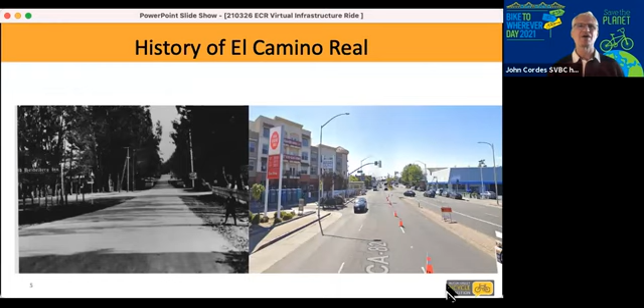All right, Gwen, take it away. Yep, so I just wanted to give a very brief history of El Camino Real.

As many of you know, originally the purpose of El Camino was to connect 21 different missions throughout the state of California, all the way from San Diego up to Sonoma. Then in the early 20th century, the section of El Camino Real from San Jose to the San Francisco county line was one of the first paved streets in California. This created a boom of building along El Camino Real, and you'll see a lot of auto-oriented motels and large parking lots, and also a lot of the major downtowns for cities along El Camino are just right off of El Camino.

These photos, I tried to line up exactly at the same spot, but the first one is from 1914 in San Bruno on El Camino Real, I think right at the San Mateo Avenue intersection, and the one on the right is today. You can see there is new development along El Camino, but you still have a lot of that historic auto-oriented land use and also streetscape. Next slide.

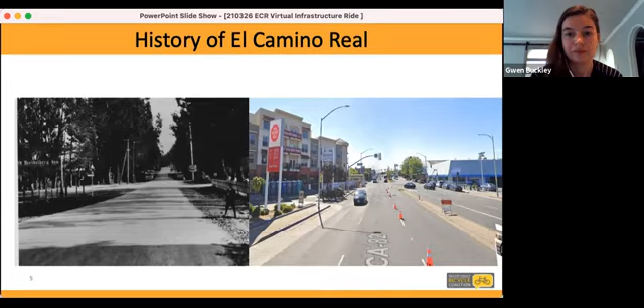As cities were looking at El Camino and how to improve it and make it more people-oriented, they decided to get together and form the Grand Boulevard Initiative in 2006. GBI is a combination of 19 cities along El Camino Real, both counties, Samtrans, VTA, and regional agencies, including Caltrans, which owns El Camino Real because it's technically a state highway. The primary vision of GBI is to work together to create these connections across the different communities and transform it into more of a people-oriented destination. Next slide.

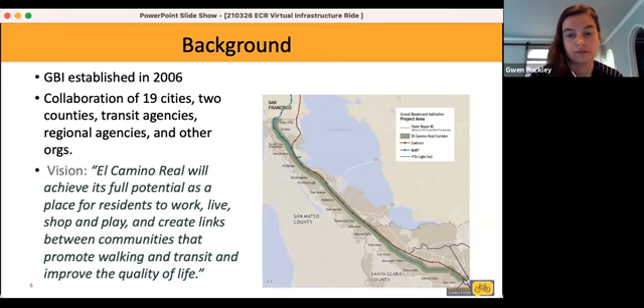Talking quickly about some opportunities for improvement from the transportation perspective: pre-COVID, traffic was getting worse and worse, and it wasn't sustainable to keep focusing on the automobile. There are lots of opportunities for alternative modes of transportation. El Camino Real is a direct north-south connection going through many downtowns and connecting many different destinations, so there's opportunity for bike facilities along El Camino. It also touches a lot of major transit stations, including 5 of the 6 BART stations in San Mateo County, within a quarter mile, as well as a quarter mile of 10 Caltrain stations, with even more Caltrain stations within a half mile. It's also a major corridor for bus transportation. Next slide.

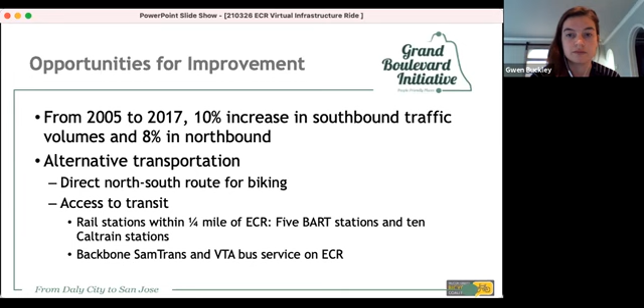GBI provides overarching coordination and shares best practices, with common goals and guiding principles, but it's up to each individual city to implement the GBI vision in ways that best serve their community. You'll see a lot of that today in these presentations, showing how there's an overarching need to improve El Camino Real, but each city approaches it in ways that best serve their community based on different unique needs. Spoiler alert: Burlingame has huge trees that other cities don't, and that's another factor they have to consider. Here's the website if you want more information about GBI.

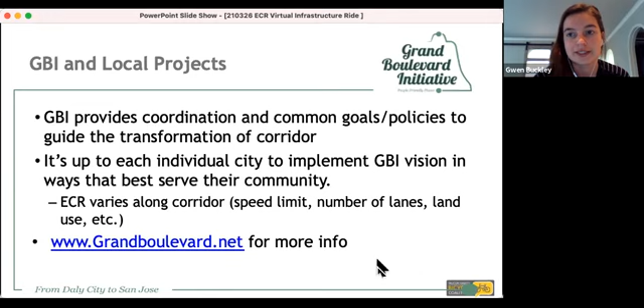Here are the segments of El Camino Real that we'll be talking about today, going south up to north on our virtual bike ride.

And with that, I will hand it over to Santa Clara to start us off.

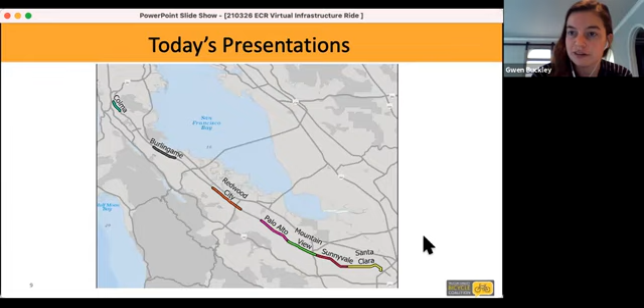Thank you, Gwen. Once again, I'm Lesley Xavier with the City of Santa Clara. I work in the planning department and am the project manager for the El Camino Real specific plan. Also with me today is Carol Shariat from our Public Works Department, and we're going to split the presentation.

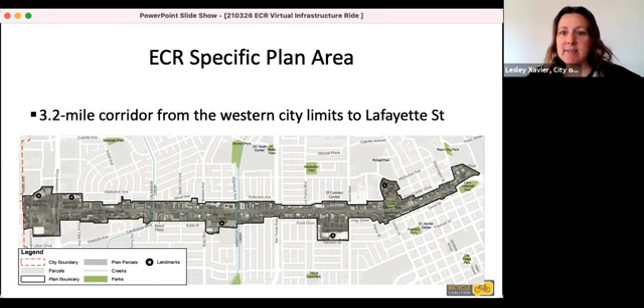A little bit about our project: El Camino Real in the City of Santa Clara is a 3.2 mile long corridor from the western city limits to Lafayette Street in the east. Our specific plan covers both sides of the corridor and actually includes our city hall as well.

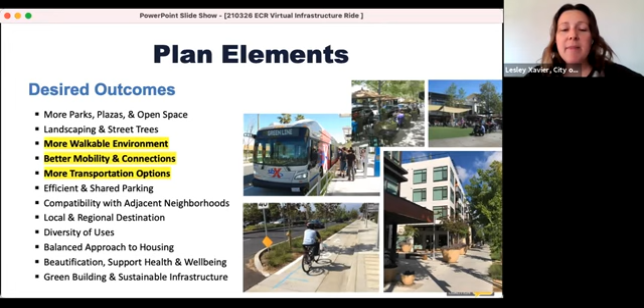Today I'm just focusing on the transportation related portions of our specific plan process. Some of the desired outcomes from our extensive community outreach process was to make the environment more walkable, with better mobility and connections. At the eastern end of our corridor is the Santa Clara Transit Station, which will have future BART and currently has Caltrain and bus service, adding more transportation options.

Here's our mobility framework for the specific plan. The goal is to make El Camino Real a multimodal corridor. It currently caters to cars, as everyone knows, with 3 lanes in each direction and parking on both sides. Buses pull in and pull out at the curb to load and unload. So the goal of the specific plan is to make that a multimodal corridor, providing connections north and south to the corridor as well.

We have north-south connections that are a transit priority access corridor, shown as the orange lines. We have a bicycle priority access corridor, shown as green lines going north to south. And vehicle priority are the blue lines north to south, along with our expressways that traverse the corridor—providing connections for all those different types of modes.

I believe Carol was going to start with these slides. Hi, once again, I'm Carol Shariat, the Principal Transportation Planner in the City of Santa Clara. Here we just want to show existing conditions, what we have today on El Camino.

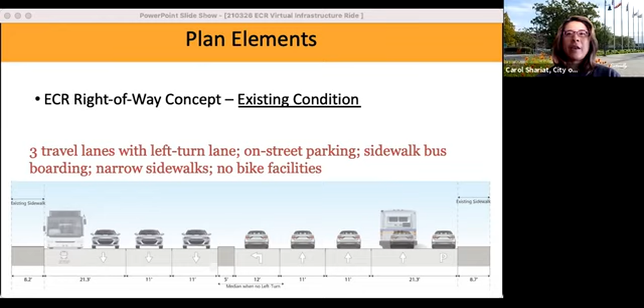We have 3 travel lanes and a very wide right turn lane due to our paving project that occurred on El Camino. We had asked Caltrans if we could widen that right turn lane in anticipation of a bike lane. You'll see that we have very narrow sidewalks and on-street parking, and no bike facilities.

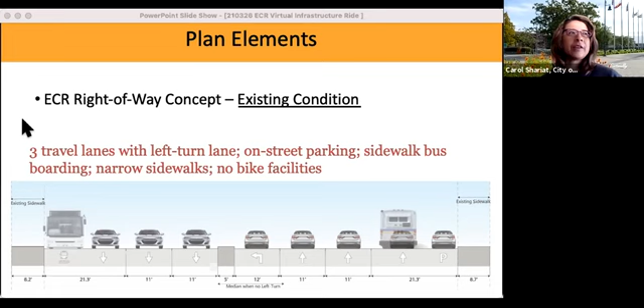We have an interim concept developed for the project. We want to put in some type of physical barrier—it could be a median or some type of bollards. We do have our bikeway planned, but we don't know yet exactly what it will be; it may be a buffered bikeway, or possibly a class 4 facility. This is just the interim until redevelopment projects come through. We don't have any funding for this yet, but this is our initial vision of what it could look like, with wider sidewalks, street trees, and removal of on-street parking.

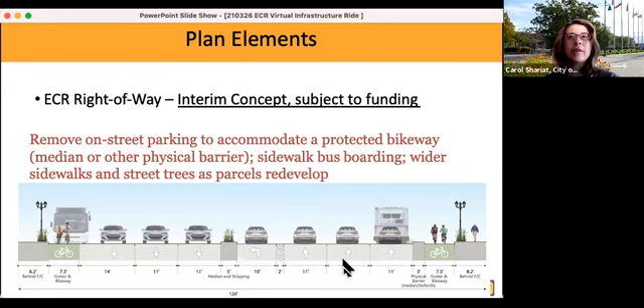Our final concepts, once everything has been redeveloped, include 20-foot sidewalks, street trees, furnishing, a cycle track, and bus boarding islands.

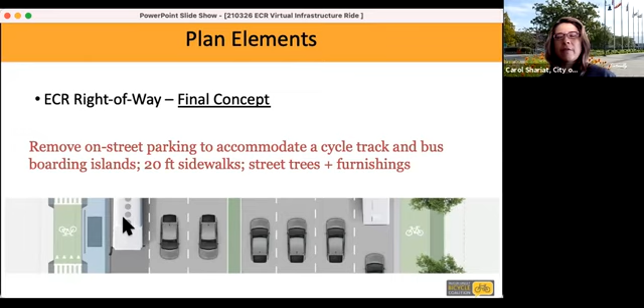This is a bird's eye view of what it would look like. On the left-hand side is where we would have our bus boarding islands, as if we had a bus stop there. On the right side is where we do not have a bus boarding island. You can also see our protected bike lanes as well.

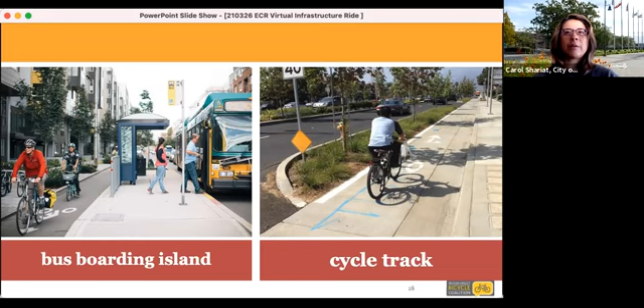These are just some examples showing what it could look like. We haven't really determined what our cycle track will look like, but at least we wanted to provide examples for everyone in the public. On that left side is an example of our bus boarding island.

I'll hand this back over to Lesley. Sure, so we're currently making some revisions to the specific plan. We should be done with that in the next few weeks for our Planning Commission hearing at the end of April, and then an adoption hearing in front of the City Council at the end of May, early June.

Our website is up there. The draft plan is posted on the website. In the next coming weeks, our final revised draft plan will be posted there as well. Thank you.

Hi, good morning, my name is Lillian. I'm going to start my presentation on the segment of El Camino Real within the city of Sunnyvale.

The portion of El Camino Real within Sunnyvale is approximately 3.7 miles long, starting at the western city limits at Bernardo Avenue and ending at the eastern city limit at Halford Avenue. It is a 6-lane arterial with 3 travel lanes on each side, with a posted speed limit of 35 miles per hour.

Along the corridor, most of the land use is retail and commercial, with some residential developments. Generally, under existing conditions, some segments have on-street parking, and some segments do not have on-street parking.

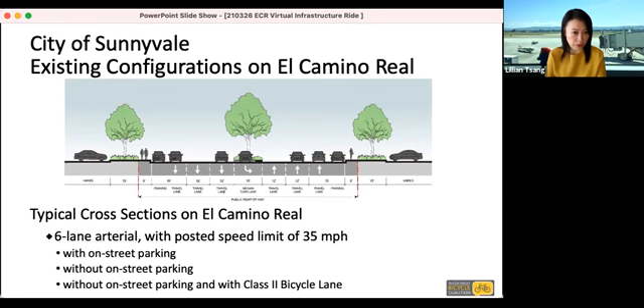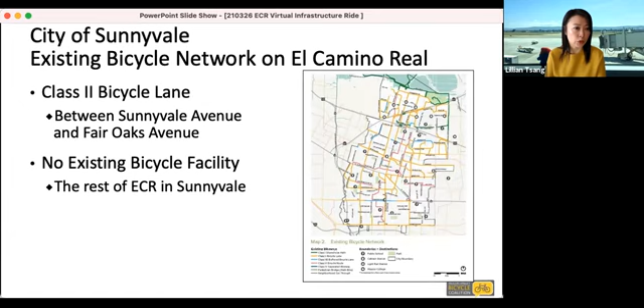On El Camino Real, under existing conditions, the only location where we have bicycle facilities is between Sunnyvale Avenue and Fair Oaks Avenue, where we have a class 2 bike lane on both sides of the street.

In August of last year, we adopted the Sunnyvale Active Transportation Plan, where we identified proposed bicycle, pedestrian, and safe route to schools improvements on Sunnyvale streets.

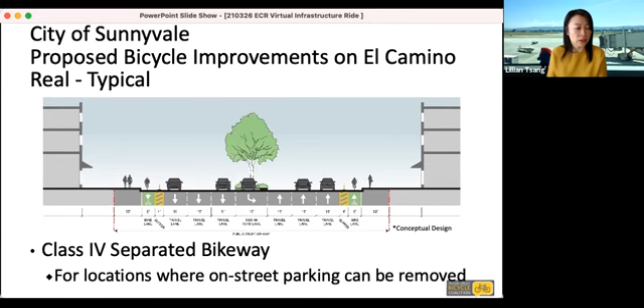The proposed bicycle improvements identified on El Camino Real include a class 4 separated bikeway, at locations where on-street parking can be removed. What we're planning on doing is putting some kind of physical barriers between the vehicular travel lane and the bicycle lane.

Along the other road sections of El Camino Real, on-street parking will remain, and what we're looking at is installing a class 1 multi-use path behind the curb.

Implementation for both the class 1 and class 4 facilities on El Camino Real are longer-term improvements which we have identified in the ATP. We envision that we would be implementing them as properties are redeveloped in the future.

The other improvements we have identified are located at the triangle bounded by El Camino Real, Wolfe Road, and Fremont Avenue. Back in 2016, we conducted a Wolfe Road corridor traffic improvement study.

In June of 2016, the City Council approved some of the safety improvements in this area. Some of the highlighted improvements we identified include installing a new signal at the intersection of Fremont Avenue and El Camino Real.

And reconfiguring the lane configuration at the intersection of Wolfe and El Camino, such that we can redirect some of the traffic away from that intersection and make the circulation for this triangle a little more smooth.

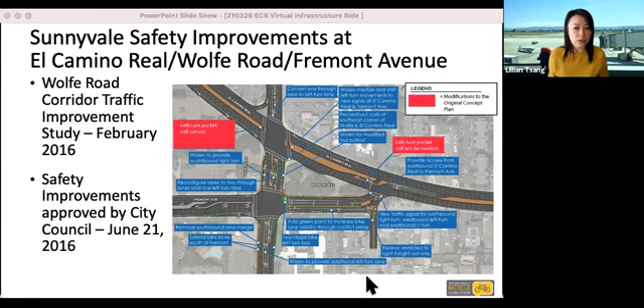We are also working on the El Camino Real corridor specific plan update. We anticipate the draft will be released for public review end of this summer, and the final plan adoption by the end of this year. If you want to find out more about the updates, you can visit the project website, or you can contact Jeffrey Cusinota, our senior planner in the community development department.

And if you want to find out more about what we have identified in the active transportation plan, you can go to our city website and search for the plan, or you can also email me for any questions you have. Thank you.

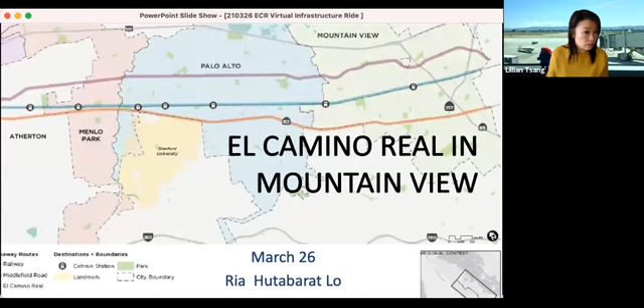Okay, so now we're moving to Mountain View. I'm Ria Hutabarat Lo, the Transportation Manager for the City of Mountain View. The Grand Boulevard Initiative envisions El Camino as a place to live, work, shop, and play through a combination of multimodal links and community-focused nodes that go all the way from Daly City to San Jose.

With that in mind, the City of Mountain View has attempted to both think and act regionally and locally as we plan for El Camino Real in our city. This planning includes the Cross-City Peninsula Bikeway Initiative, carried out via the Managers Mobility Partnership, a partnership of 4 cities: Mountain View, Palo Alto, Menlo Park, and Redwood City. The initiative has been convened by Joint Venture Silicon Valley.

Within that partnership, we're looking at 3 corridors, which you can see in this map. The first one is Middlefield Road, up at the north end of the map. The second is the kind of Caltrain right-of-way corridor, not necessarily Caltrain, could be Central Expressway, Evelyn, Alma, some combination, shown in blue in the middle. Then the orange one on this map is El Camino Real.

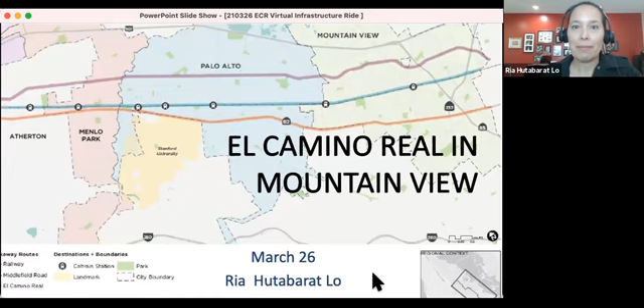At the local level, we've also been planning through a number of plans. One of them is the general plan, which identified El Camino Real as a change area within the city of Mountain View. Additionally, we have the El Camino Real Precise Plan, which called for either buffered or protected bicycle facilities along El Camino Real. And thirdly, we have the El Camino Real Streetscape Plan, which furthers the concept design for these bike facilities along the 4 miles of El Camino Real in Mountain View.

The Streetscape Plan was developed with input from the community, as well as a technical advisory committee, which included Caltrans, which owns El Camino Real the roadway, VTA, which runs its buses along El Camino, and Los Altos, Palo Alto, and Sunnyvale. The plan was approved in 2019.

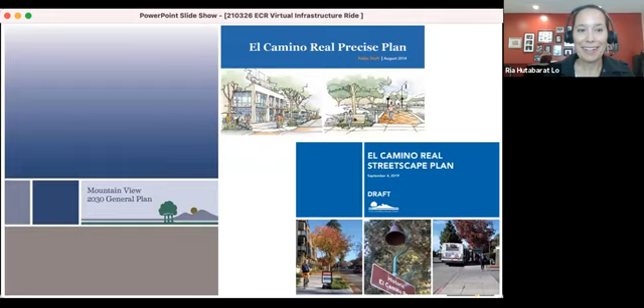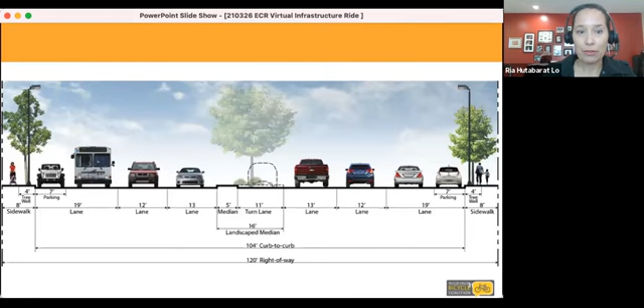Under this plan, we envision El Camino Real as shifting from its current configuration as an urban highway with wide travel lanes that allow for fast speed if there's not too much congestion. It has parking and has no bicycle facilities. It would move to a more pedestrian and bicycle friendly facility.

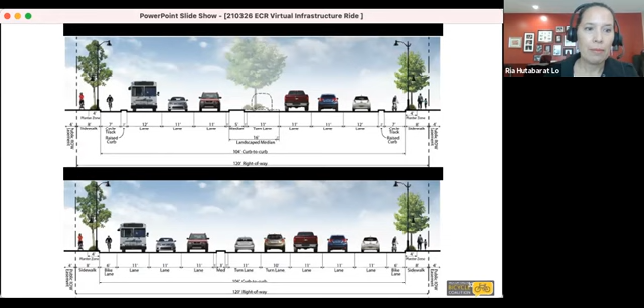Also, at intersections, we plan to have protected intersections at the cross corridor connections. So locations such as Calderon and Castro Street, those cross corridor locations would have protected intersections, and also new crosswalks at locations where there's a long distance between crossings. There are 3 of these locations: one is Pettis Avenue, shown here, and also Bonita and Crestview. There would also be intersection improvements for pedestrians at all of the intersections.

So improving the visibility for pedestrians, which also improves facilities for bikes as well, since pedestrians are more visible too. Let's move to the next slide, please.

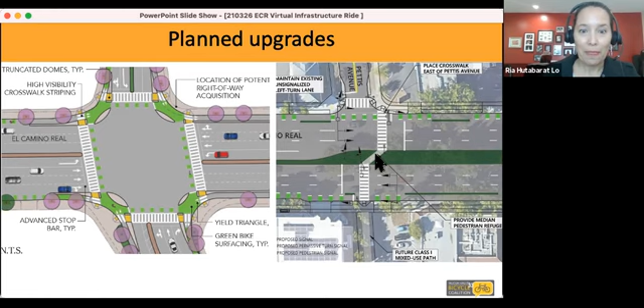As I mentioned, Caltrans is the owner of the roadway. While we were undertaking the El Camino Real Streetscape Plan, we learned that Caltrans has plans to repave El Camino north of Grant Road, from the 237 to the county line. So we started thinking about what we could do to go from the planning of the Streetscape Plan to implementation as quickly as possible.

For many bikeway projects like this, one of the major concerns that the community has is the potential for impacts to business as a result of removing parking in order to facilitate new bicycle facilities.

This work wasn't actually part of the funding we had for the Streetscape Plan. It was carried out very kindly by staff from the Capital Projects Group, Traffic Group, and Transportation, and it was a very collaborative effort that happened all day, all night, on weekdays and weekends. So we obtained this information on where people are parking or not parking, and in places where they're parking, whether they have other options and are just using the on-street parking out of convenience.

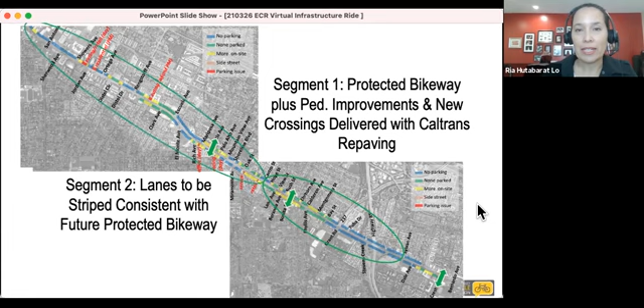Based on the parking study and the work we did to initiate contact with Caltrans and get this integrated into their project, we also pushed as staff to get this into our capital improvement program, our 5-year capital improvement program, as soon as possible. It's now in the capital improvement program, and we're working with Caltrans. We argued this was a high priority; to get into the first 3 years means other things are getting displaced or shifted around, and that's a big ask.

But we argued that it saves the city a lot of money to do this as part of a Caltrans repaving project, as opposed to going out there and having our own project where we're digging up the road again, and it wouldn't be as clean as if integrated into the Caltrans project. We've also been pleasantly surprised at how cooperative Caltrans has been to embrace this kind of initiative, and we expect it to be built by about 2023.

We're looking forward to El Camino becoming a better place to work, to live, to bike, and to be in Mountain View, and we're excited to see this work continue across the region.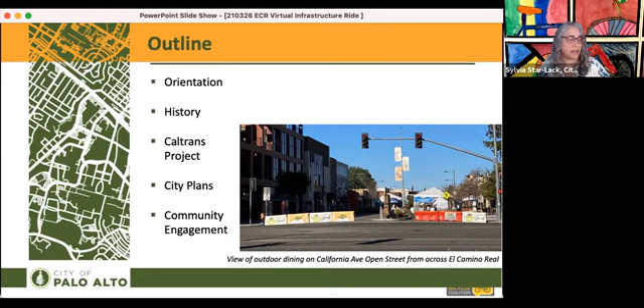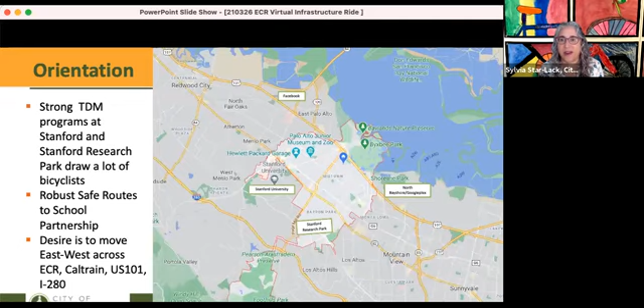To set the scene, I'm sure most of you know Palo Alto is located between Menlo Park and Mountain View at the bottom of the peninsula. In Palo Alto, El Camino Real runs north and south. We have some of the highest bike commute ridership in California, I believe around 8 to 10%. Biking's in the DNA of our city.

We've been hosting bike safety education for children in town since the 50s, and we're a town that values the ability of children to walk and bike to school, which has impacted our bike planning in town. Another reason biking is popular here is that the adjacent transportation demand management programs of Stanford University and Stanford Research Park are very strong and draw a lot of bicyclists.

They are located on the west side of town across El Camino Real from most of our housing. In addition, Palo Alto is within biking distance of Facebook and Google, which I also labeled here, to the east, and getting across 101 is important for people who want to bicycle to those locations.

Our housing is located in the middle of town, with employment located to the east and west on the other side of barrier infrastructure. Layered on top of this are the 4,000 children who bike to school every day in Palo Alto in non-pandemic years. That's one-third of our students who bike to school, and that count doesn't include students who walk to school. We're talking about bikes, and our robust Safe Routes to School program, our partnership with the school district and PTA, has allowed us to invest in biking and walking in town.

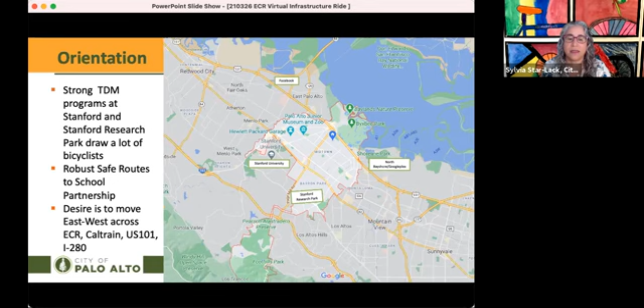Next slide, please. I want to show you what the resulting bike network is here. Focusing on this network, this map is a combination of bike lanes, bike routes, and quiet streets that are great for biking in town.

Note that we've invested in north and south bike routes that are parallel to El Camino Real. The Bryant Street Bike Boulevard and the Park Boulevard Bike Boulevard are here. And I also want to mention that we've also focused on improving infrastructure to get across the freeway, highway, and Caltrain barriers in town.

The small red and blue dots on the right side of the map show the new Adobe Creek pedestrian and bicycle overcrossing location. That's going to open this summer, and we're very excited about that. The open red circles show our upcoming efforts to improve El Camino Real crossings, and I'll talk to you about those in a bit.

We do have two multi-use paths just off of El Camino Real that are parallel, that are right there, but they don't connect to each other and they're hard to get to.

On the left side of the map along El Camino Real, you'll see a light green trail—it's faint, but it is there, closer to the green Stanford Arboretum indicator. That line represents the Stanford Perimeter Trail that the university built, or is building, to ring the campus. But that trail is open to the public.

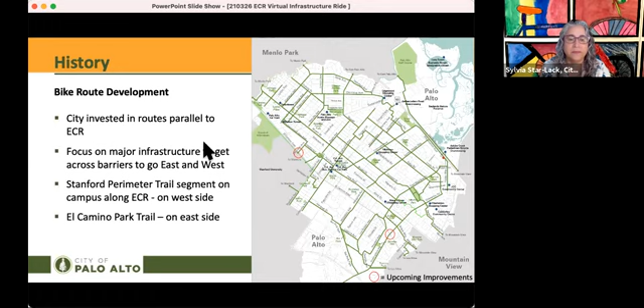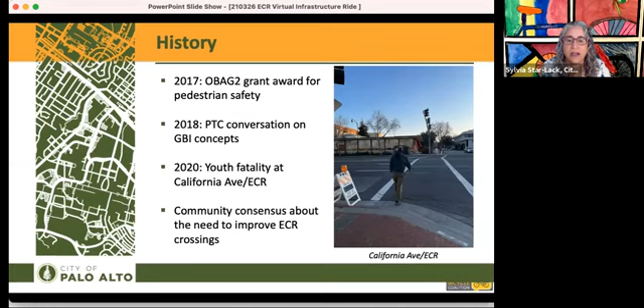Next slide. There have been some recent attempts to address El Camino Real in Palo Alto. In 2017, the city was awarded a grant to improve pedestrian safety on El Camino, but the project scope did not include bike facilities, and we were unable to change the scope of that grant. So the city will not initiate this project due to the limited scope.

In 2018, our planning commission reviewed Grand Boulevard concepts for El Camino, but did not recommend that these move forward to council. Unfortunately, in 2020, just before shelter in place, a youth was killed trying to cross El Camino Real at California Avenue, which is the intersection pictured here. This tragedy has invigorated the El Camino Real conversation regarding the safety of people crossing and using the road.

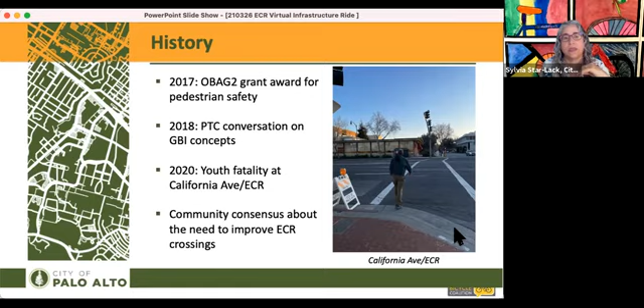Next slide. It turns out that Caltrans has a project to repave El Camino that Ria just mentioned to you. The purpose of this project is to improve safety, access, and mobility for pedestrians at signalized intersections. The scope of the project is to repave the road, provide wheelchair ramps, sidewalk repairs, accessible pedestrian signals, and pedestrian countdown timers. Construction is scheduled to begin around late May of 2020.

Caltrans told cities they could add out-of-scope items—like Mountain View is adding out-of-scope items to their project—if they had three things by the end of 2020: first, a council-approved project; second, a project that had already gone through environmental review; and third, funding to pay for those improvements that cities wanted to add to that scope.

Because of Palo Alto's focus on crossing El Camino Real, our bike plan did not specify projects along El Camino Real, and Palo Alto has not had a robust conversation about what should happen on the corridor. So we did not put forward a project for inclusion into the Caltrans repaving project. However, we did ask Caltrans for a few things.

Next slide. We spoke to Caltrans about complete street design elements within their project scope. I know that Sergio's on this call, and I have to talk to him about our request—but we did speak to the repaving project manager.

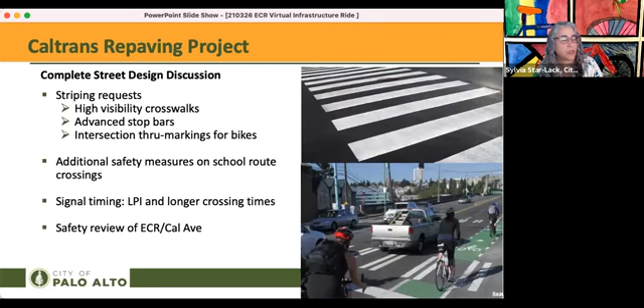As mentioned earlier, we've been prioritizing crossing El Camino, and we have 2 upcoming projects addressing this.

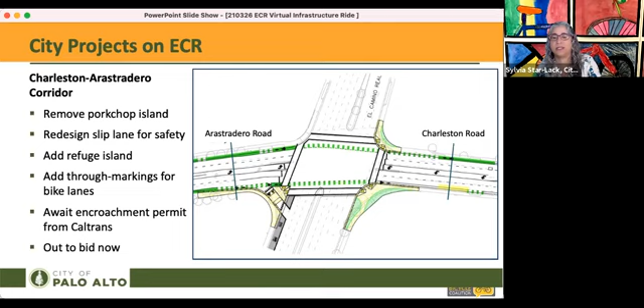The project will remove a pork chop island, redesign a slip lane for safety, add a refuge island, and add through markings for bicyclists across El Camino. The city awaits an encroachment permit from Caltrans, and the project is out to bid now.

Next slide. To the north, the Churchill Avenue Enhanced Bikeway project will connect the Embarcadero Multi-Use Path, or the Caltrain Path as it's sometimes called, to the Stanford Perimeter Trail that I mentioned earlier, by improving the crossing at Churchill Avenue.

We have an existing multi-use path that goes left to right in this slide, east to west, that drops about a block away to the east of this pictured intersection at Palo Alto High School, where in normal times 1,000 students bike to school daily.

This project closes a gap between the 2 trails and will give riders a low stress way to access, to get across El Camino Real to access either trail. We're coordinating with Stanford University so that on their end, cyclists will have appropriate connections to the perimeter trail.

We await an easement from the school district to move forward. The city will have an upcoming community meeting for this project and hopes to go out to bid in early 2022 once design is final.

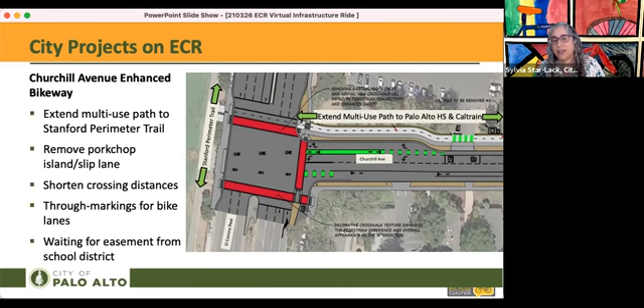So what will Palo Alto's portion of El Camino Real look like in the future? In the short term, to protect our most vulnerable road users, we've asked our City School Transportation Safety Committee, which is our Safe Routes to School partnership, to let us know what signage, striping, and signal timing changes they'd like to see that we can forward to Caltrans staff to fit into the repaving project.

And as I mentioned before, we've already forwarded all of their suggestions to Caltrans, and Caltrans is willing to work with us and add items to their project as feasible. Also, I'm always open to hearing from folks about what needs fixing, and you can always email me, and I will gladly engage Caltrans in this conversation about how to make things better. And my email is on the next slide.

In the future, coming up—I'm not done yet—beginning this summer, the city will update our 2012 bicycle and pedestrian transportation plan. That plan update will be an opportunity for the community to let us know what they'd like to see in town and what they'd like to see on El Camino.

If we receive clear direction and prioritization, staff could rescope a project on El Camino Real and apply for grant funding. We know that there's interest by VTA and Caltrans in upgrading El Camino Real, and a regional approach may be warranted here. In the meantime, we will continue to prioritize improving the crossings of El Camino Real for safety.

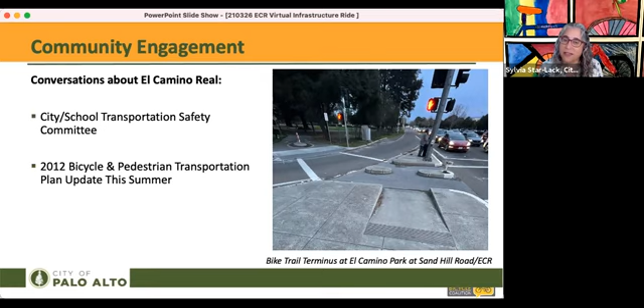Thank you for your attention.

It's now my great honor to introduce the fabulous and talented Jessica Manzi of Redwood City. Thanks, Sylvia. And I would say that in Women's History Month, what an honor to be on a panel with so many amazing women. So thanks, Silicon Valley Bike Coalition, for giving us this opportunity to come together.

As you've heard from many of the other communities, here in Redwood City we share this vision to transform El Camino Real into the Grand Boulevard that supports walking, transit, bicycling, and economic development. For us, this is represented by the upper left image on this slide from our 2011 downtown precise plan.

Since then, we've been working to improve and strengthen the streetscape consistent with the ideals of the Grand Boulevard Initiative. Our first comprehensive plan was the El Camino Real Corridor Plan, which developed a vision, goals, and strategies for the corridor with a focus on housing, economic vitality, placemaking, and mobility. Then with the help of the GBI team and a sustainable planning grant, we completed the bike and ped safety improvement study to develop preliminary bike and ped design concepts on our segment of El Camino, where we have the highest number of bike and pedestrian collisions, which for us takes place between Maple and Charter Streets.

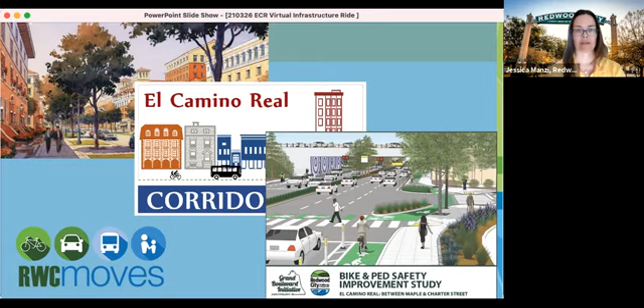During the various outreach efforts, we've heard very clear direction from our community on their priorities for how to improve El Camino. First, they want protected bikeways. Being comfortable biking on El Camino really depends on having a physical barrier between the bike lanes and moving traffic. To get the space for a barrier or buffer, they much preferred keeping the existing number of travel lanes, but removing on-street parking. That's consistent with what we see in a lot of other communities that have spoken so far. Where we run into challenges are those segments where we have 3 travel lanes and no parking, so there are some segments where simply removing the parking won't be sufficient to get us a protected bike lane.

Second, there's a need for more safer crossings. Enhancements could include high visibility crosswalks, median refuges, stronger traffic control with hawk signals or pedestrian hybrid beacons, and shortened crossing distances. Obviously where these safer crossings are provided, it's a benefit for pedestrians as well as bicyclists that are crossing El Camino.

Third, there's a lot of interest in improving El Camino where it goes underneath Woodside Road, which can be dark, loud, and feel very unsafe. Here we're looking at things like improved lighting, artwork, along with dedicated space for people who are riding their bikes.

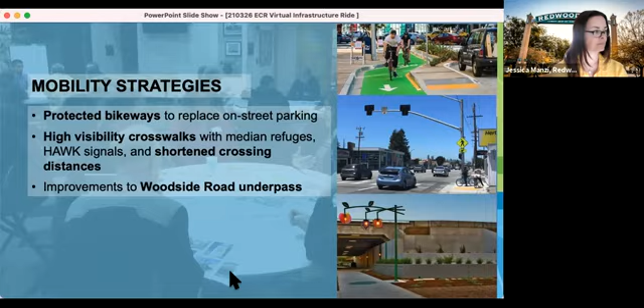Looking forward to our next steps, we have a grant from the San Mateo County Transportation Authority to advance our design work. For this, we're going to focus on some key design challenges on the corridor. Again, not unique to Redwood City, but first and foremost, we will be working on how to design a protected bikeway that's compatible with and supports our small businesses.

This top image shows a common configuration in Redwood City where we've got a lot of small shops with no alternative to El Camino for deliveries or garbage pickup or just how they run their day-to-day operations, not even getting into the question of where customers might be parking. So that's a real challenge. With the effects of the pandemic on small business, we're very sensitive to making sure improvements meet their needs as well as the mobility needs of the whole community. We're also going to be looking at how best to accommodate bus stops next to the bikeway and prioritizing locations for those enhanced crossings.

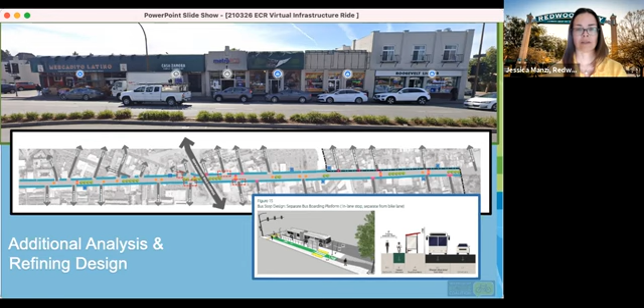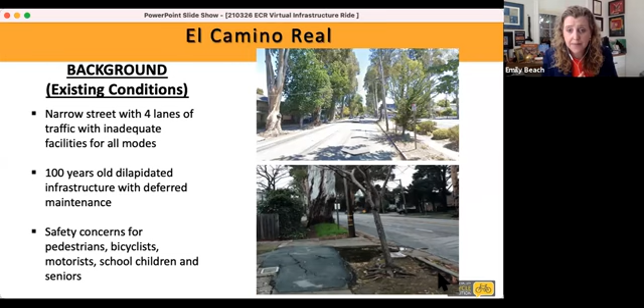Let's go to the next slide. You can see that many of the sidewalks do not have any trees between the sidewalk and no shoulder on the roadway, so it's extremely dangerous for pedestrians. And you can see the tall 100-year-old trees.

Let's go forward. You can see that some of the sections of El Camino Real have retaining walls where the trees are being held up. Next slide, please.

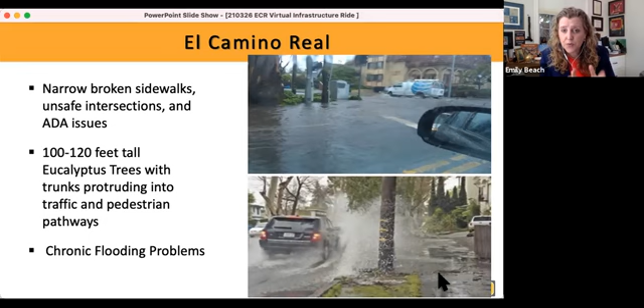In rainstorms, it's particularly exciting. You can see this is an example of the flooding in El Camino Real in Burlingame. If you advance it a little bit further, you'll see another picture - that's very typical. Even in the lightest rainstorm, you nearly hydroplane when you're driving an automobile. You can see what it does for pedestrians. So it's really unsustainable what we have in El Camino Real. Next slide, please.

So what do we do about it? Well, one of the major problems that has existed for the better part of 50 years is that Burlingame values our trees, but they wreak a lot of havoc on the infrastructure. This is in large part a staff effort that knows way more than we electeds do, although I feel like I've had a master's degree in engineering over the last 5 years, to understand how to rehabilitate the roadway in a meaningful way, to fix the drainage, to really dig down and regrade the highway, which has never been done.

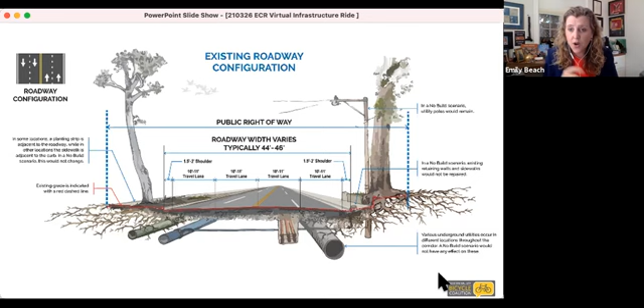In order to get federal funding to fix the sidewalks so they're ADA compliant, there has to be massive rehabilitation. Through a very thorough public process, hand in hand in partnership with Caltrans - which is really groundbreaking work to work so closely with them - our community, including stakeholders like the president of our historical society, our traffic safety parking commissioners, and our beautification commissioners, has come to understand that many of the trees may have to be replanted in order to make the road more sustainable, because destabilizing many of these trees is necessary to make the roadway and sidewalk safer for all modes. That's a big deal in Burlingame, so as we share what's happening, you have to understand what that means to our community.

A little bit about the process and where we are. For over 4 years, there was a citizen task force where 2 members of the council, President Michael Brownrigg and I, served along with many community stakeholders, including folks who actually live on El Camino. The task force, hand in hand with Caltrans, figured out we can move forward with shared values: safer and wider pedestrian pathways, safety improvements, infrastructure considerations like crossings and flood protection, and preserving the look and feel, which may look different and may require replanting of the tree canopy. Those trees are part of the California Historic Register, so they have to be dealt with even from a historical perspective. It's very important how we're moving forward.

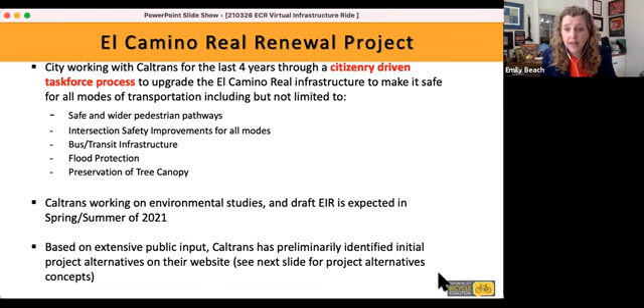Where we are in the process right now: after 4 years of the citizen task force, last year Caltrans initiated the project and had a lot of public outreach. This spring or summer, they are releasing the draft environmental document, and that's where we need people to weigh in and comment on different project alternatives. They've already started to identify different possible alternatives - nothing detailed yet, but how it might look. We're very fortunate that Caltrans has prioritized this project so highly that they have at least $100 million put forth, according to their website, to make this project happen, because they see this as a critical priority. Next slide, please.

We don't have time to go into these in detail, but these are some of the conceptual cross sections they're considering. They're considering build alternatives where they keep the 4 lanes of traffic basically as 4 lanes, and keeping the utilities overhead.

They're considering another alternative: what could happen if those utilities are undergrounded. The city of Burlingame would have to play a significant role, and we're prepared to put a significant portion of resources to try to make that happen as well.

The other build alternative they're considering is a road diet. So they're in the process of studying what that would mean, what you could do within that section of the roadway, and what that would mean to the local roads if a road diet happens.

And then the fourth cross section is what would happen if a road diet is considered while also undergrounding utilities.

You can't talk to two members of the community or two members of the city council that necessarily share the same opinions about where this should go, but different ideas are out there. I've heard from the community. Some people want to see the 4 lanes of traffic. Some people want wider spaces for shared use sidewalks for bicycles and pedestrians. Some people want more room for a wider planter strip so more trees can be planted to protect pedestrians. Other people want to see a turn lane for automobiles.

Some people want express bus, other people want bike lanes. All that remains to be seen as Caltrans puts forth their proposed design alternatives, and then after they figure out what to do with the space, what the details will look like. So we hope people will engage.

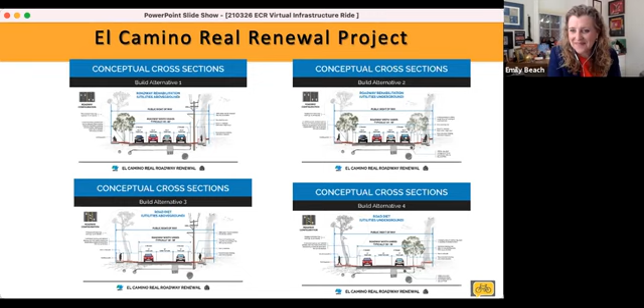Thank you, Emily. As Emily said, we don't entirely control what happens on El Camino. We have to share that cooperation with Caltrans, although we are very attentive, particularly at the intersections where people are moving east-west across town for our high schools and our shopping, and we look very carefully at intersections in our bike-ped master plan to make sure those crossings are safe.

I think what you would find in our master plan, and I think it would be easier if we just move right up to the next slide.

Before we go to the next slide, I would say we invested a lot in the bike-ped master plan. We spent several months doing outreach. We had a very sophisticated website that asked citizens in Burlingame to give particular input for any given intersection where they thought there were issues. We did very specific outreach to schools, since a lot of our bike population is school children, high school and middle school kids who don't necessarily show up for evening planning meetings to give input on particular intersections. So we really went out of our way to get outreach from those populations, showed up to schools, and asked questions before we put this master plan together.

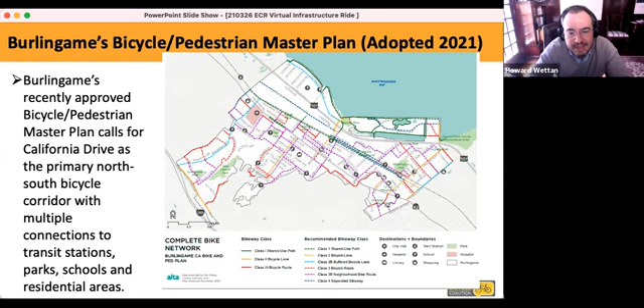I think if you could go to the next slide, it'll show that we've given a lot of thought to moving across Burlingame from what we call north-south, but obviously from the map it's really more of a northwest-southeast direction. We have another arterial that runs parallel to El Camino Real, California Drive. That arterial ends at the Millbrae Transit Hub, which is the last stop for BART. Running along it there are 2 Caltrain stops, and it's very close also to our high school.

For the last 8 or 9 years since I joined the Traffic Commission, the city has given a lot of thought to making that corridor more bikeable, so that people who come into Burlingame can get across Burlingame and use it to get to key spots in town. And I think it really started, we've started essentially at the top.

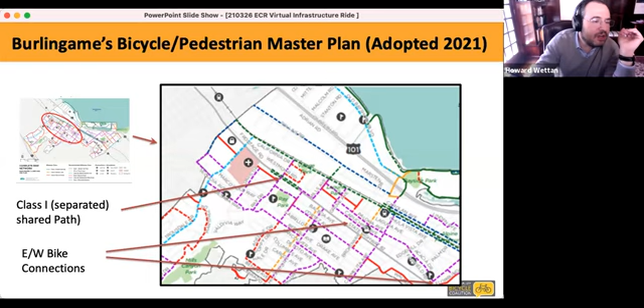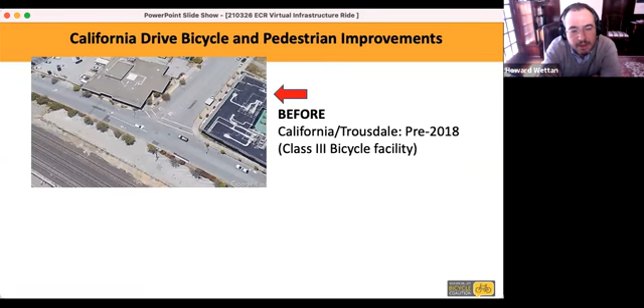If you could go to the next slide, what it shows is a before and after picture. A couple of years ago, we rehabilitated parts of California Drive, where people were trying to bike to work to get to the Millbrae Transit Hub. We've now put in bike lanes there, you can see the green dashes, right in front of our police station. I believe we have some other good before and after pictures, if you advance the slides.

You can see there's a person moving in the street, the sidewalk paths weren't good. We've added the bike lane there. You can see there was a car parked in the before picture next to the parking lot.

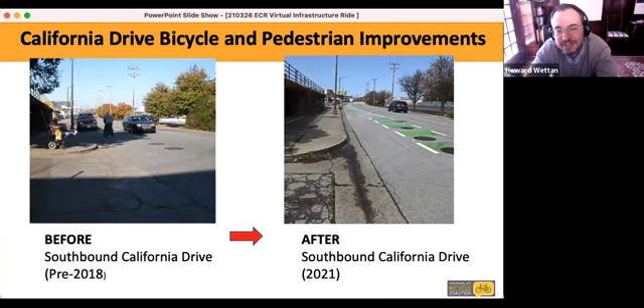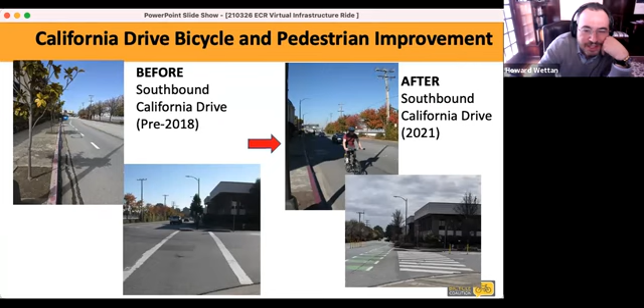If you advance one more for me. Yeah, you can see again we've added a bike lane, it's become more bikeable. You can see, it's hard to see unfortunately, but there's actually a dumpster in the before slide, pre-2018. We had a regular deposit of a dumpster in the lane where people are trying to bike.

So we've done a lot of rehabilitation in California Drive, all the way from the Millbrae Transit Hub down to Broadway. We've received another grant to redesign California Drive south of Broadway, going down to Oak Grove towards our high school. We also received a grant to do a road diet on Carolan, the next parallel road over, which runs between our Broadway train station and our high school. We're trying to be as thoughtful as possible about bicyclists, where they're going in Burlingame and how they can get there safely. That will continue to be challenging as work gets done on El Camino, and as we consider a Broadway grade separation across our rail tracks. Working with city staff on those issues, we give a lot of thought to how that area's redesign will be a massive improvement for bicyclists and pedestrians, not just for traffic and cars.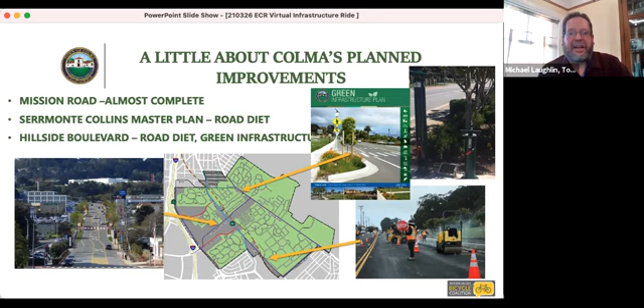Several years ago we did a Serramonte Collins master plan, with an artist rendering on the left showing Serramonte Boulevard with a road diet going from 4 lanes, 2 in each direction, to 1 lane in each direction with a center turn lane to add improvements. Finally, Hillside Boulevard, a project we've won several awards for, it's a road diet that added green infrastructure and bike lanes. We also got a grant from Kaiser Permanente to put in a bike repair station in front of our community center, adjacent to Hillside Boulevard. Next slide please.

So how we came to prepare the plan. This is El Camino Real, which as you'll see from some pictures needs improvement. Not a lot has been done on El Camino Real for many years. It's been a wish list for the Planning Department and Public Works Department. We applied for a Caltrans Sustainable Communities grant and received it, then hired Fehr & Peers to prepare the plan. We started in October 2018 and just finished the plan.

The plan covers the area from the Colma BART station to the north, heading south into South San Francisco, not too far from the South San Francisco BART station. There are two distinct roadway sections, which we'll call segment A and segment B. Segment A is 3 lanes in each direction, and segment B is existing at 2 lanes in each direction.

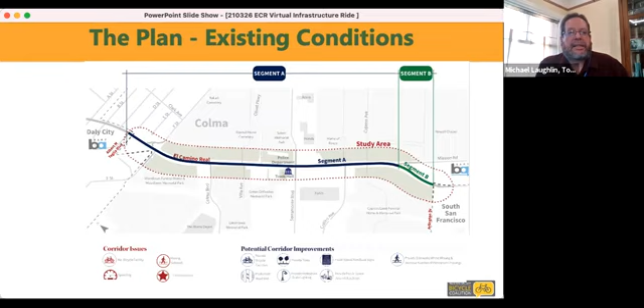This is the existing El Camino Real, and as you can see, it's very rural in nature. We have a wide center median with a lot of drainage improvements, including a drainage culvert. So we looked at options to basically keep the center median, which is also used for cut-throughs into cemeteries, for funeral processions, and other businesses. It would require quite a bit of work to change that, and we felt we'd be more competitive for grant funding if we kept the center median.

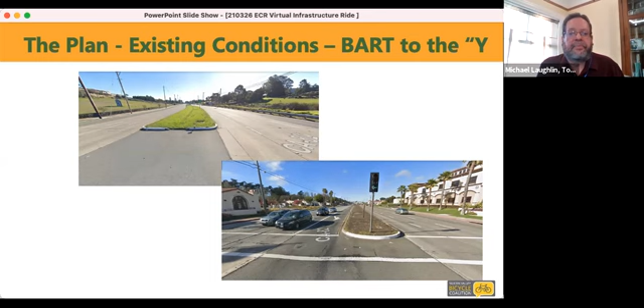The picture on top is what we affectionately call our Y intersection, at Mission Road, which is actually the old portion of El Camino Real before it was realigned. This is probably one of the most inhospitable intersections you can imagine for bicyclists and pedestrians. Below, you can see how El Camino Real transitions into 2 lanes heading south into South San Francisco, where there's very little shoulder room available to put in improvements.

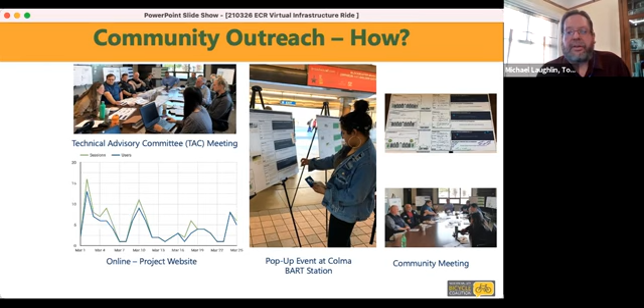So we formed a technical advisory committee comprised of our neighboring cities, South San Francisco and Daly City. Caltrans was at the table, as well as stakeholders including property owners and businesses along the El Camino Real corridor. We set up a website, had surveys, various community meetings, and pop-up events at the Colma BART station to try and get feedback on the plan.

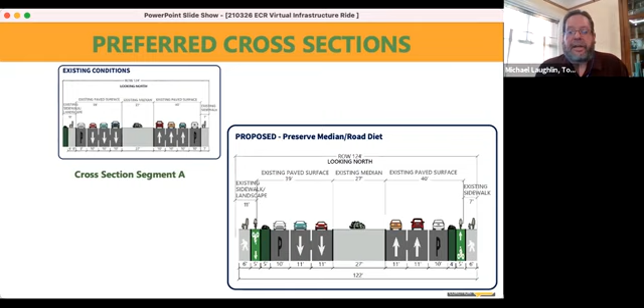What we ended up with, the preferred option, was to propose a road diet on El Camino Real. For segment A, we went from 3 lanes in each direction, as you can see in the upper corner, down to 2 lanes, taking out the 3rd lane in favor of a protected bicycle lane, sidewalks, and some landscaping.

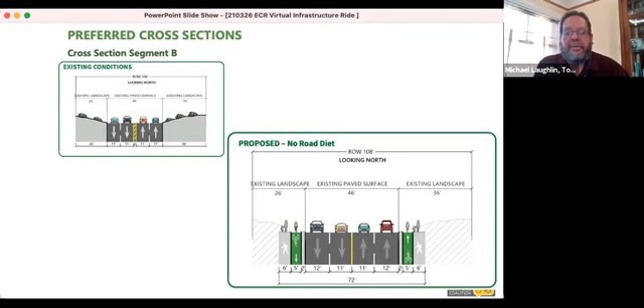For the segment going into South San Francisco, we have to keep 2 lanes in each direction, but we need to use some of the remaining right of way. It's going to be a little tricky to get the bike lane and sidewalk in that area, but it is feasible.

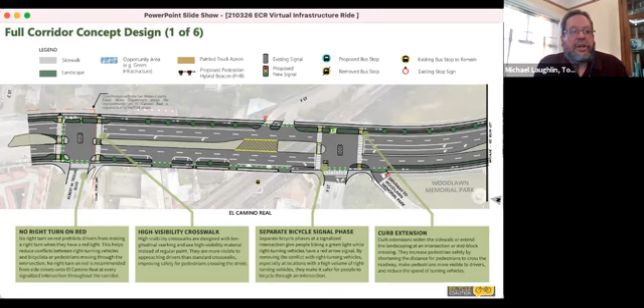This is what the plan looks like in plan view. You can see we've included all of the various types of intersection improvements you'd expect: protected crosswalks, pedestrian refuge, separating the bicycle signal phases, and curb extensions. We'll be adding green infrastructure and landscaping as well.

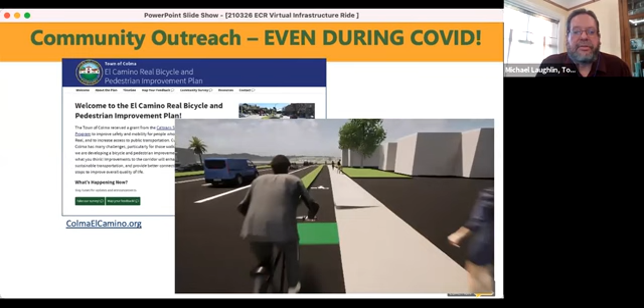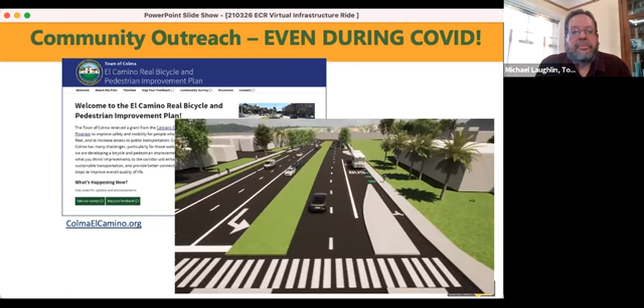This is a very quick simulation of the improvements, heading north.

This is the intersection of Mission Road that I showed you earlier, the Y, and how we've basically reconfigured it into a more traditional T intersection to add the bicycle and pedestrian improvements. It's especially critical because there's a bus stop on the other side, and we have an affordable veterans housing project on Mission Road, and those folks have no way to get to the bus stop for El Camino Real.